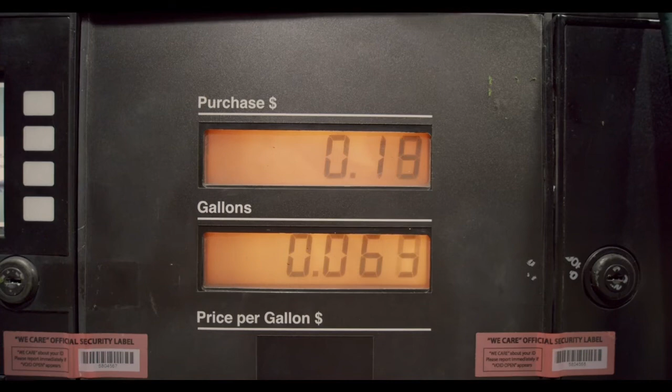The current economic crisis, triggered by, among other things, the sudden rise in consumer prices of raw materials, has also affected the market value of electricity and heat. Electricity, in particular, has experienced a steep rise in sales costs, allowing renewable energy companies to make extra profits.

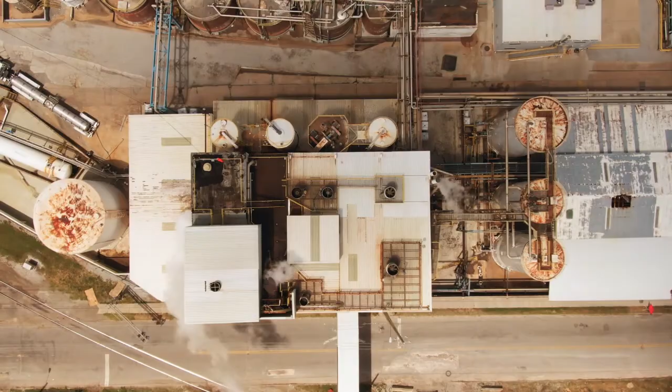In such a scenario, which is destined to last, it becomes crucial for states to use as many renewable energy sources as possible, such as waste, in order to contain energy production costs. It is no coincidence that the European Union recently stipulated that waste should be understood as an alternative fuel rather than a waste to be dumped in landfills.

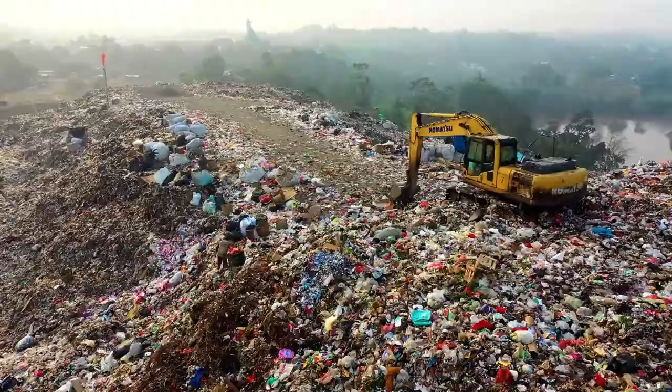Hafner's proposal to increase our country's energy independence consists of building small modular thermoelectric power plants fueled by residues, with a view to delocalization, in order to give even the smallest communities far away from larger population centers the opportunity to manage the waste produced autonomously and process it as an alternative fuel.

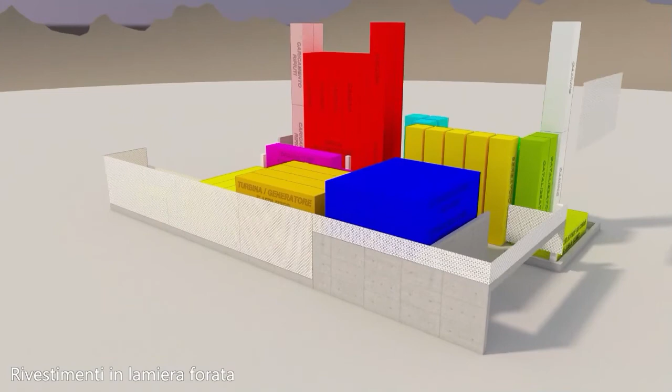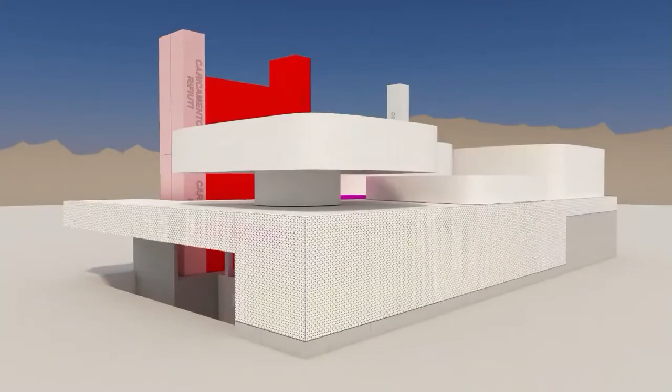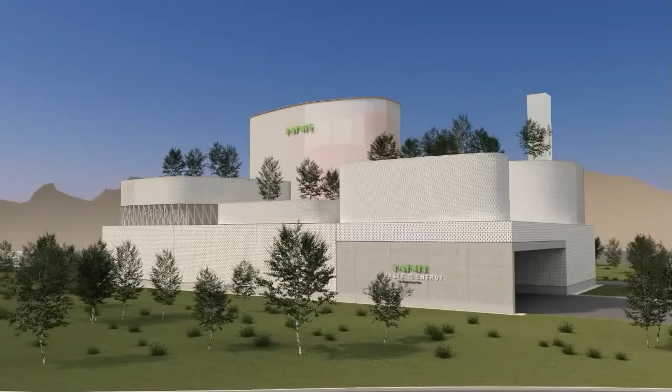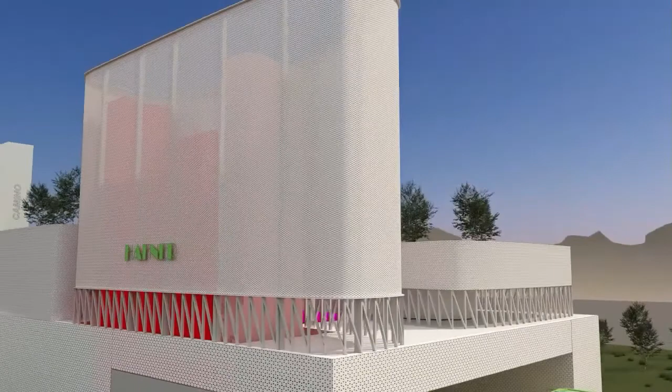In order to realize our proposal, Hafner has developed a new standardized product called the Hafner SLIMLINE. The SLIMLINE can process up to 25,000 tons per year of municipal, industrial, and/or hospital waste. The latest technologies also allow us to capture the CO2 produced during the combustion process, thus contributing to European climate neutrality goals, and to build these plants within 12 to 18 months of obtaining the necessary permits.

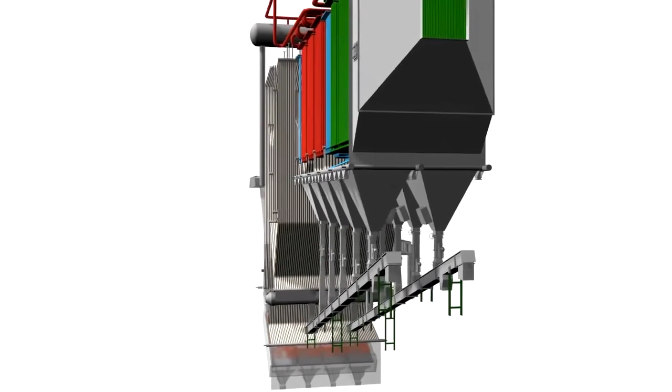We can now analyze in detail what the processes are within a waste-to-energy plant and how the waste is transformed into heat and/or electricity. Let us take the example of the municipality of Bolzano in South Tyrol, where the share of separate waste collection is around 73%, making it one of the best regions in Italy.

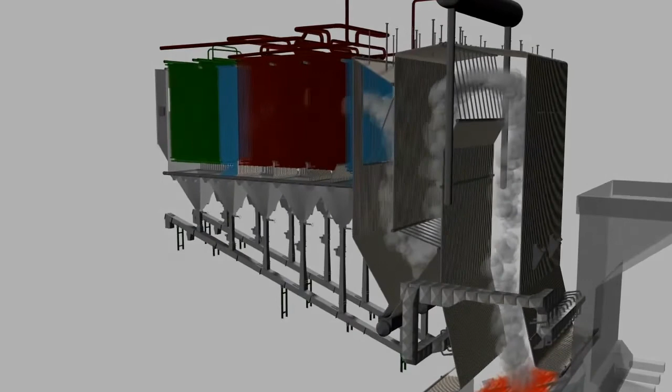However, the remaining 27% of non-recyclable urban waste is sent to the waste-to-energy plant to be recovered in the form of energy. Let's take a quick look at the various waste-to-energy processes.

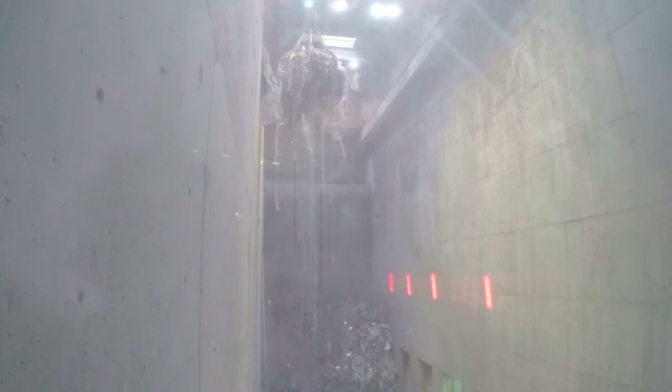When the lorry carrying the waste arrives at the plant, it dumps the waste as it is in the waste pit, without any pre-treatment. A spider, controlled from the control room, first mixes the waste in order to have a homogeneous product, and then picks it up and loads it into the hopper in order to constantly feed the oven.

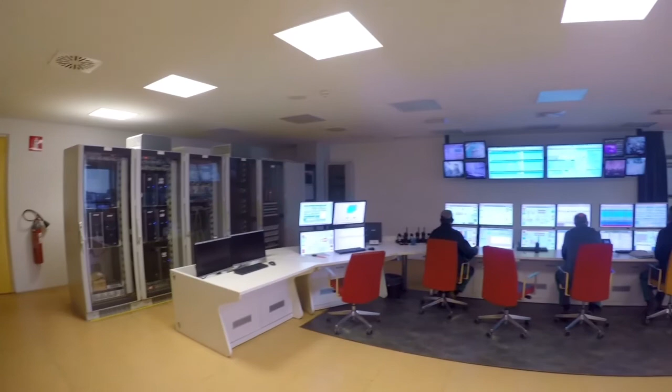The control room is the brain of the plant. In this room, the shift manager monitors both the plant through a dense network of surveillance cameras and the management software for the various automated processes.

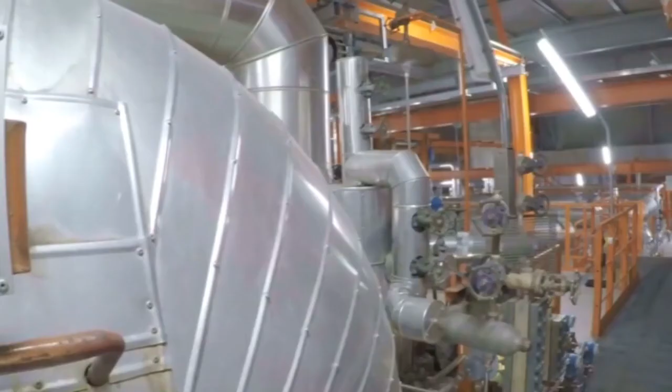In the combustion chamber, the waste then burns at a controlled temperature between 900 and 1100 degrees, so that the combustion is self-igniting, without the need to introduce fossil fuels.

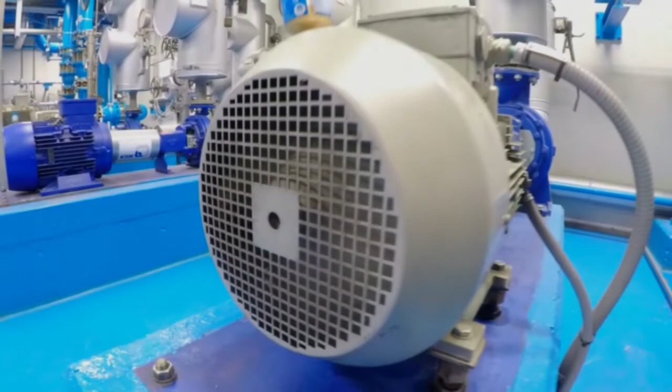The heat generated in the combustion chamber heats water, which becomes steam. The steam, in turn, feeds a special turbine that transforms the steam into electricity. Furthermore, if the city hosting the plant is equipped with a district heating and cooling network, the excess steam is used to feed this infrastructure and thus generate not only electricity, but also thermal energy.

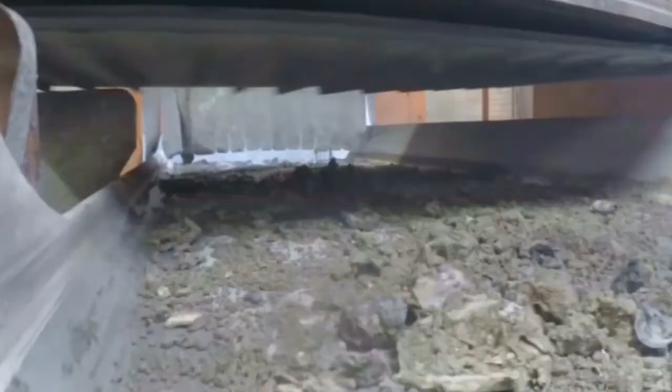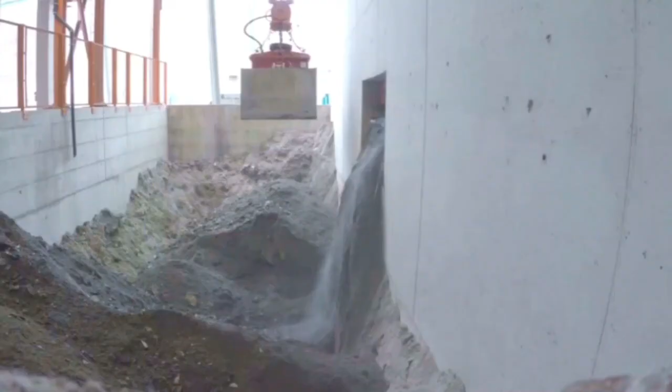Once burned, the waste is transformed into combustion waste, which is mainly composed of ash and ferrous materials or glass. The ash is stored in special silos and then disposed of in landfills as special waste, while the ferrous materials are recovered using a magnetic strip.

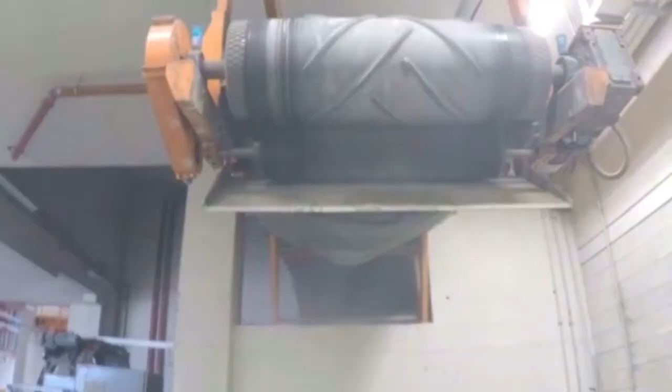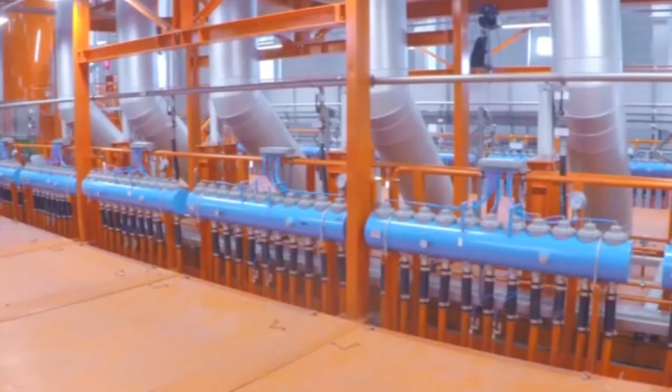Finally, the flue gases are cooled and filtered with special filters and a catalyst before being released into the air. The filters work with charcoal and lime for initial coarse cleaning, and then with charcoal and sodium carbonate for deeper cleaning. Finally, to remove nitrogen oxides, the fumes pass through a catalyst that converts them into harmless gases, such as nitrogen and water vapor.